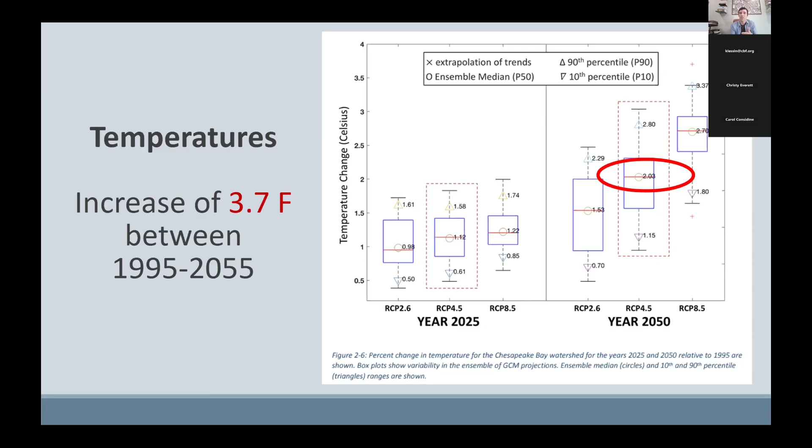For temperature, the median projection for 2055 is a 2.03 degree Celsius increase in temperature compared to 1995, which is the baseline that we use. In Fahrenheit, that's a 3.7 degree increase. Now that's Chesapeake Bay watershed-wide average. Obviously there's going to be some minor fluctuations depending on where you are.

Tying that into water, specifically precipitation first, you might have heard that warming climates are fueling larger storm events, like some of the major hurricanes that we've seen over the past couple of years, the large flooding events in Texas and Asheville, North Carolina, as well as locally.

Part of the reason for that is that warmer temperatures result in more cloud capacity for moisture. There's increased evaporation and humidity, and then those clouds can hold on to that moisture, and the rain falls in greater volumes over fewer rainfall events.

So while total average annual precipitation in the DC metro region from 2002 to 2021 is only about 5 to 15% higher relative to the beginning of the century, 1900 to 1960, there's been a 60% increase in the total precipitation falling in the heaviest 1% of days. So basically, these changing conditions are making 'when it rains, it pours' very literal, very tangible.

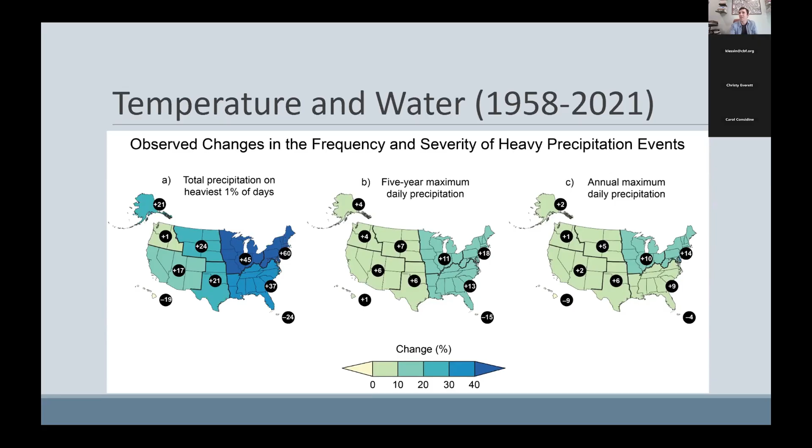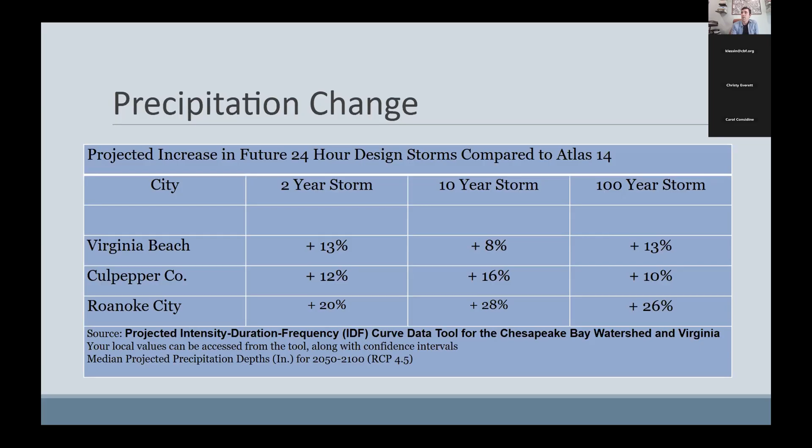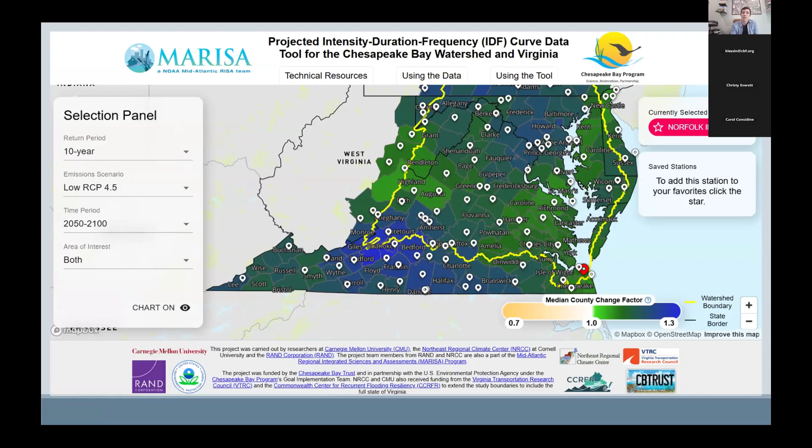This leads to obviously real world consequences in terms of flooding and water quality protection.

The other component, for our coastal folks, of the water projections and changing conditions is sea level rise. This is also from the Chesapeake Bay Program's climate assessment. By 2055, we're looking at a projected 1.7 feet, or 53 centimeters, of sea level rise for the Chesapeake Bay watershed. There are a lot of implications of that, obviously, from human health and safety perspectives.

But also, I think it's worth noting, as part of this assessment, the Bay Program looked at projected tidal wetland acreages in the Bay under these changing conditions using a model called SLAM, the Sea Level Affecting Marsh Model. Using 1995 again as a baseline scenario, they modeled losses of as much as 34% by 2055 with that amount of sea level rise—so significant marsh loss. That's a decrease of 110,000 acres across the Bay watershed by 2055.

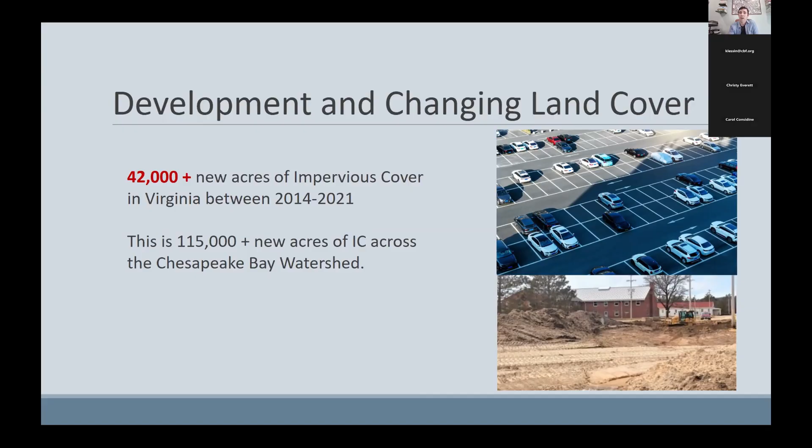And then finally, I don't think a lot of us think of time passing as a changing landscape, but Father Time does come for us all, as anyone who's been following Bill Belichick's path over the last few years can attest. Sometimes just sticking around longer than you should can have some really negative consequences for the operation of our systems. The aging of our infrastructure is in many ways its own changing condition that we have to be prepared to grapple with.

As our stormwater infrastructure continues to age, we experience myriad new problems, from pipes that corrode or break or clog, to infrastructure that just hasn't kept up with these changing climate conditions. Much of our infrastructure was designed using precipitation data from the 1940s, and it's struggling to effectively convey the modern 10-year storm event. So definitely something we have to think about in terms of our changing conditions landscape.

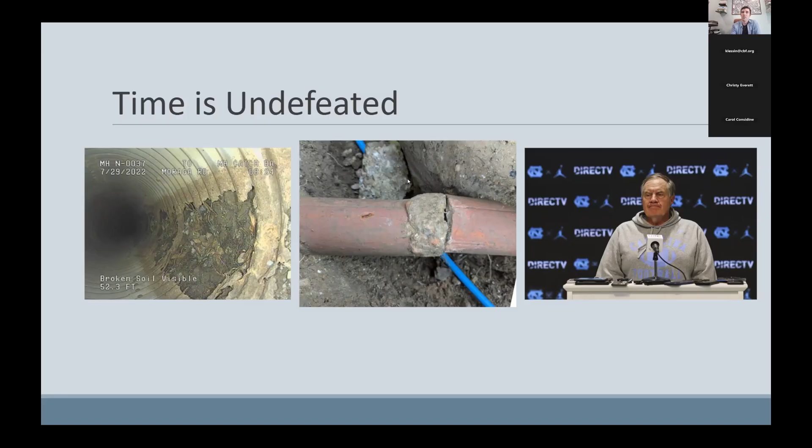So let's tie that in to the implications for stormwater managers. The subheader here for stormwater management: our runoff is going to be hotter, wetter, dirtier, and stronger. If you choose, you can sing that to the tune of the Daft Punk song for those who know it. But we'll stick to the basics here.

So we're going to start, again, going back to temperature with thermal impacts. When the air temperature warms, it heats the impervious surfaces in our communities, which radiates that heat back and transfers a lot of that thermal energy to any runoff that comes in contact with those surfaces.

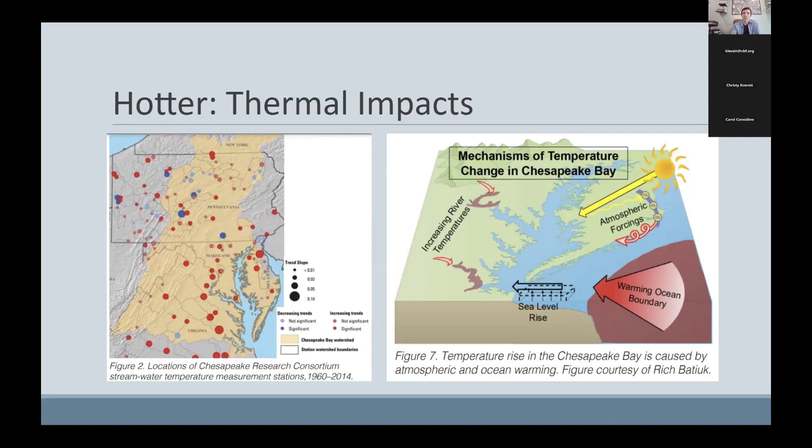So these directly influence our decisions that we make as watershed planners, as stormwater managers, about green space and green infrastructure investments, as we try to maximize our impact with the decisions that we're making.

Moving on to runoff impacts from these changes, we know that much of our existing infrastructure is undersized for future conditions. The pipes and detention basins were mostly designed using precipitation data from a resource called TP40 that came from NOAA, published back in 1961. Anything built between 1961 and 2006 used data that came from the first half of the 1900s.

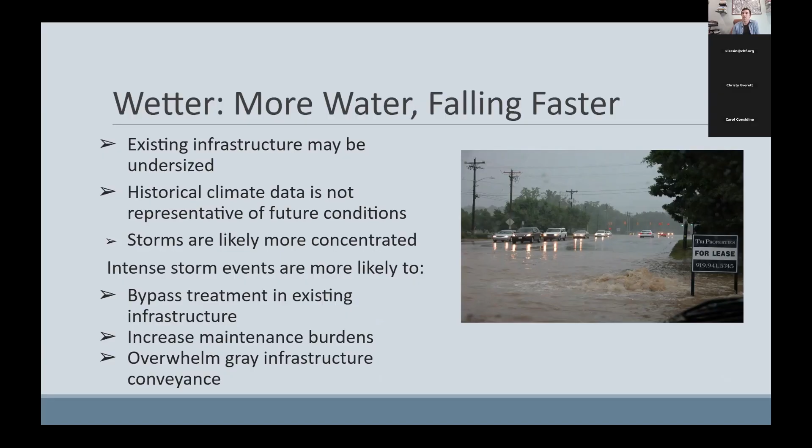As we talk about changing conditions too, the other way to look at this is with what we call our hydrograph, and a lot of you are probably familiar with this. More impervious surfaces in our watersheds and communities leads to more of the rain that falls being converted into runoff. So you have more runoff volume and more runoff velocity that you have to handle. And then you add in additional rainfall with these different climate conditions, and you amplify that effect.

In the pre-development case, when you have less impervious surface and less rainfall, you see the solid line on the graph where you get a relatively gradual peak as a storm event arrives, and it gradually recedes. Once we get more impervious cover and more intense rainfall, we get these more dramatic peaks - they are earlier, they rise quickly, and they recede quickly. Green infrastructure practices are designed to help us move closer back to the pre-development hydrologic conditions, that solid line condition that we're a little bit more comfortable with.

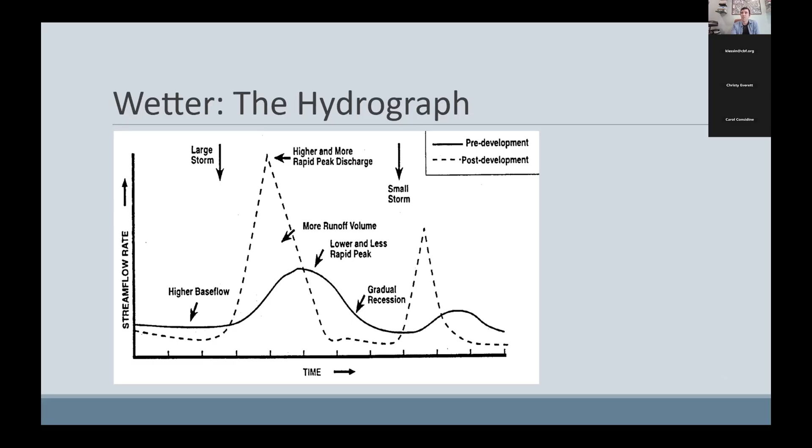Finally, just to touch on the dirtier water problem - more intense rainfall is more likely to dislodge and mobilize sediment and any contaminants that might be bound to it. We see lots of fine-grained sediments in particular being carried in suspension, and they get deposited in inconvenient places in our landscape. The top middle photo here is several inches of sediment accumulated in a detention basin. The photo on the bottom is several inches of sediment covering walkways in a park in DC.

Taken together, the impacts of changing conditions is likely to make water quality improvements more difficult. These graphs on the right come from the Chesapeake Bay Program's midpoint assessment, which was in 2017. They aren't the latest and greatest, but as they continue to run new models through their tools and refine their estimates, the general magnitude of these changes has held pretty steady.

The combination of increasing temperature, precipitation, and sea level rise has moved the goalposts of attainment of nutrient reduction goals. The change for 2025, when we were looking at it in 2017, was an additional 3 to 5% reduction required for nitrogen and phosphorus. Moving forward, we expect that level of effort to continue to increase as we go.

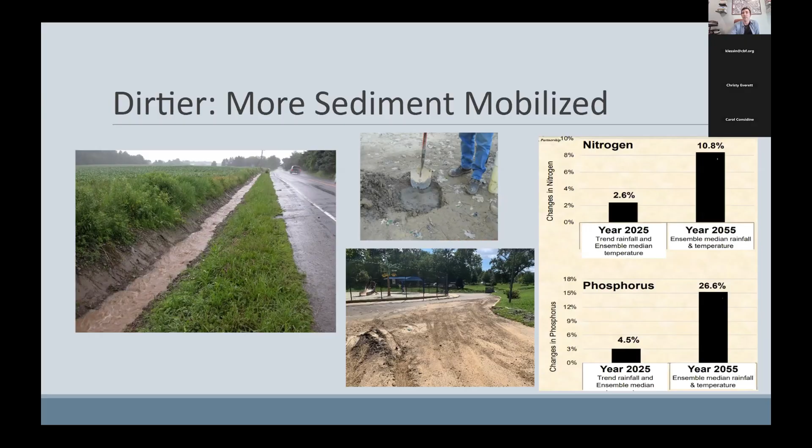So we're not only having to offset the growth of the urban sector, the developed sector with more impervious surfaces, but also the increased level of effort due to these changing conditions.

All right, so now let's make the case for green infrastructure in terms of the capacity it can provide, redundancies in our systems, and the multiple benefits that we can offer through these systems.

Starting with the most obvious or most direct, which is green infrastructure and flooding. Whether it's at the site, block, or sub-catchment level, targeted green infrastructure can help reduce localized flooding. This in turn reduces related impacts like basement backups and nuisance flooding, when stormwater inundates backyards, streets, and other public areas. When you distribute green infrastructure practices throughout a watershed or catchment, you can reduce total runoff and peak flows, which helps mitigate downstream riverine flooding and associated damages.

This is done by intercepting rainfall, creating opportunities to capture and infiltrate water. The figure here shows the decrease in peak flows, which was 5 to almost 30%, decrease in runoff depth of 20 to 50%, and decrease in total flow volumes of 25 to 45%, modeled across a range of different storm events for a watershed in New Hampshire where green infrastructure practices effectively reduced the impervious cover by about 20%.

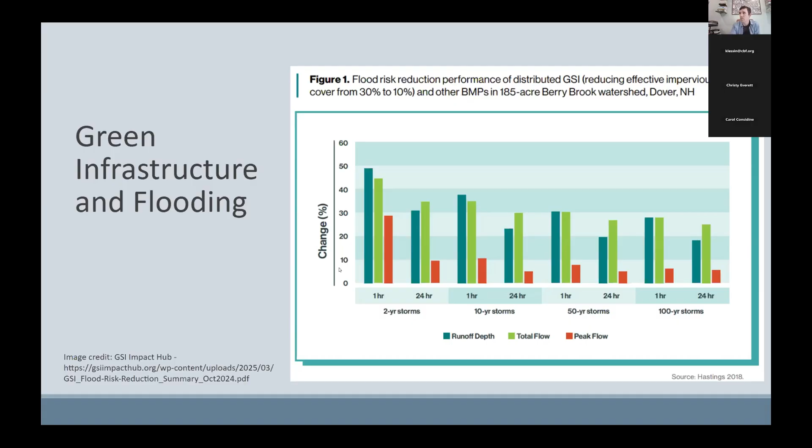Adding green infrastructure within that catchment or upstream can help reduce the flows heading to those flood-prone sections of your pipe network, and can provide some relief before you go in and dig up that whole system, which can be very costly, very expensive.

Green infrastructure strategies that include things like bioretention as well as tree-based practices also can reduce thermal impacts on stormwater by reducing heat island effects and cooling those impervious surfaces that are otherwise warming up.

A recent study modeled the impacts of green infrastructure on downstream heat loads affecting trout in Stroubles Creek watershed, near Blacksburg, Virginia. The authors found that combined practices reduced the total heat load by 62%, and the percentage of time the creek was heated above toxic levels decreased by 12% over the course of the summer. Further, heat loads from storm events were nearly eliminated altogether.

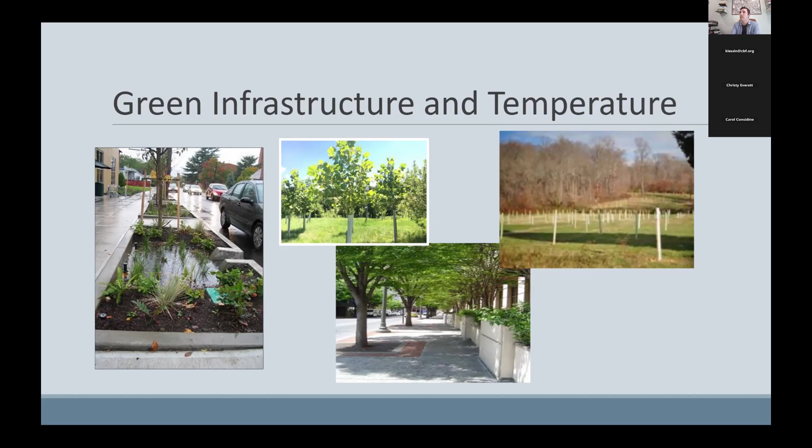It's also worth noting that, while not necessarily stormwater specific, implementing green infrastructure practices can also help mitigate heat-related maintenance and life cycle costs for critical infrastructure. For example, tree shade on asphalt reduces the impacts of heat and thus the need to repave as frequently. A study in California of shaded and unshaded streets, where large trees provided at least 20% shade, found savings of $1 per square foot in reduced repaving costs, by 58% over a 30-year life cycle. So there are some financial benefits to those impacts as well.

Then I think water quality benefits of green infrastructure are the ones we're probably most familiar with, but in the context of changing conditions, it's worth noting that because these changing conditions move our goalposts, increased rates of implementation are almost certainly necessary, even just to hold the line on pollutant reduction.

Green infrastructure also creates redundancies in our systems. Large detention systems are effective for reducing peak flows, but combining them with green infrastructure helps prevent those systems from being overburdened, and provides opportunity for capture and treatment throughout the watershed.

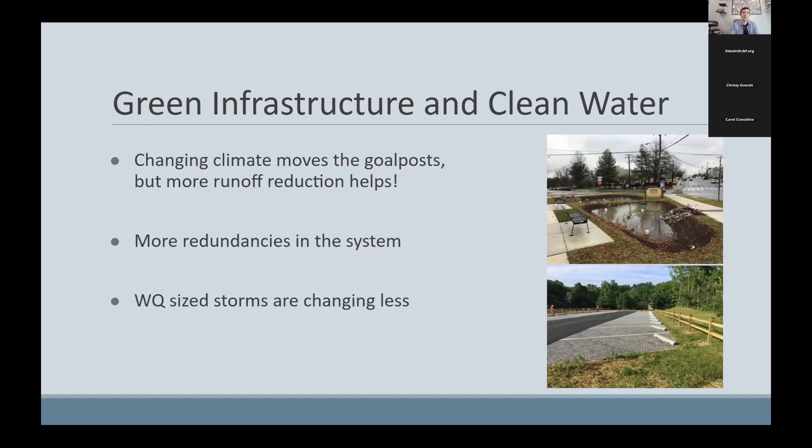Finally, while we're dealing with greater intensity storms, there's a fair amount of evidence that the 1-year storms, the 90th percentile storms, those more frequent events we're usually trying to use for water quality treatment, aren't being impacted as much. I mentioned how much of the burden of the additional rainfall volume is being added to those large infrequent events. So our water quality practices are still expected to be effective for those smaller events.

So I just want to close with three quick slides talking about some emerging challenges and upcoming resources to tie things together and lead us into Bill's talk as well. I'm just going to quickly mention maintenance, since Bill's going to talk about that much more.

While it shouldn't deter you from green infrastructure, it is important to consider maintenance at all stages of the project. These practices are designed for water quality, so we have to be aware of how large events might impact them—bypassing treatment, high velocities leading to erosion, clogged filter media, or distressed vegetation—things we need to keep in mind during the design phase.

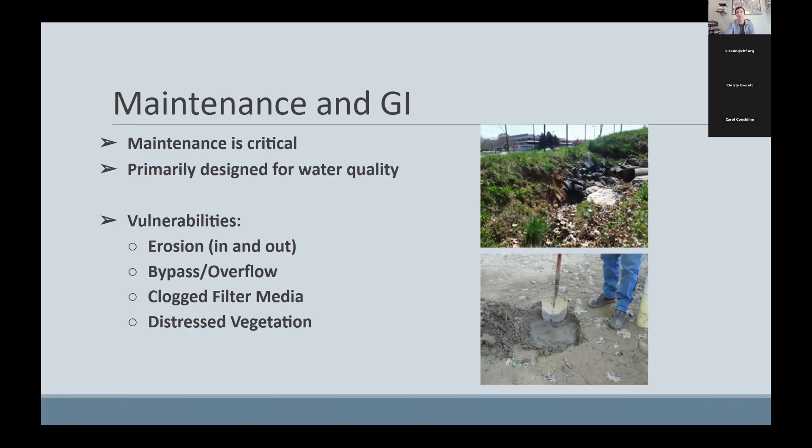Using rapid visual indicators—ways to quickly go out and check that your investments are okay without having to do a deep investigation—can help move things along and get you through your inspections more quickly.

When I talk about increased bypass of flow, what I mean is more flow being concentrated in fewer events. More of that flow is likely to move through our BMPs without having time to infiltrate, or in some cases, it might avoid entering the practice altogether. A study in New York in 2016 found 23 to 40% bypass for a lot of bioretentions during extreme events.

The non-extreme event bypass often happens because of maintenance conditions, like the one shown on the right. But a lot of times it's a poorly designed or undersized inlet—again, things we have to think about in our design.

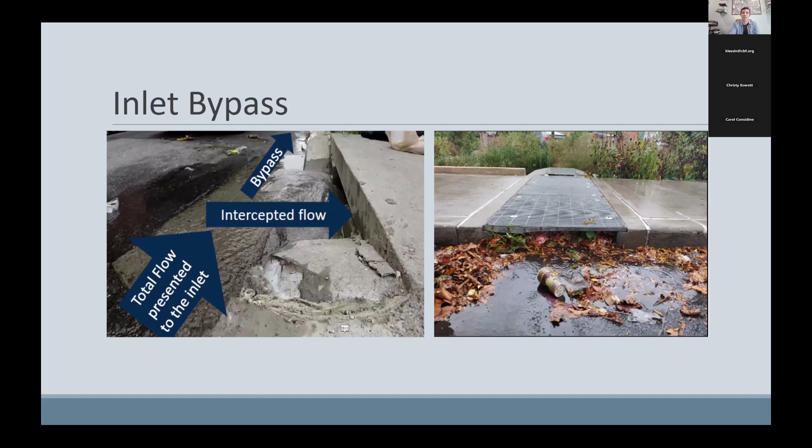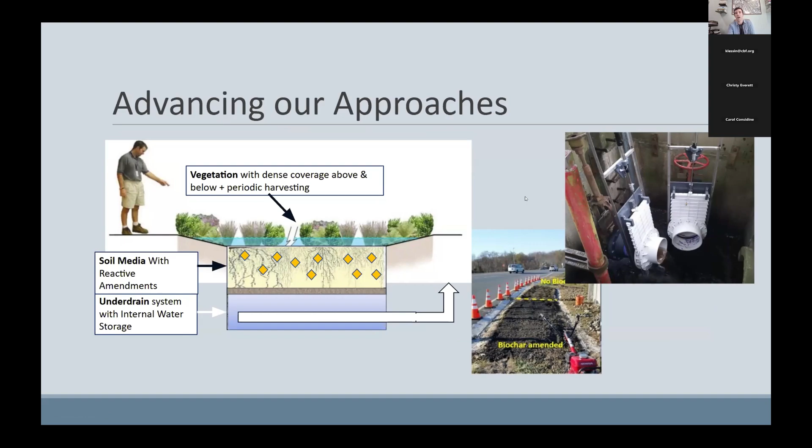Or we can squeeze more performance within the same footprint by doing things like adding soil media with reactive amendments or biochar, which can help increase storage volume. We can also modify our underdrains to create more internal water storage, or improve our vegetative practices as well.

This is the last slide—I just want to mention a couple of tools on the horizon as we continue to deal with these changing conditions. These are all coming from a project that the Chesapeake Stormwater Network is working on with a great team from RAND, Carnegie Mellon, Cornell, and the Watershed Institute.

The first is a practical guide to vulnerability assessments for stormwater agencies—different approaches to conducting vulnerability assessments, and determining what the right fit is for your resources and your needs.

The second tool is a way to basically interpret and use those climate projections more effectively for planning and design decisions—how do you decide which emission scenario or which time frame to use?

And then the last is a series of resilient stormwater design guidelines—essentially a menu of options we can take with our approach to designing green infrastructure practices that will make them more adaptable or more resilient to these changing conditions and changing landscapes.

Those are all coming out between this winter and the end of next year. So, a lot to run through—hopefully I didn't run too far over time. There's my email if anybody has questions, but I look forward to both Bill's conversation and the discussion.

Thank you, David. You provided a lot of information, but I think you did it in a way which hopefully won't be so overwhelming. Kudos to you for getting all those key topics in there, weaving in a very changing landscape, literally and figuratively.

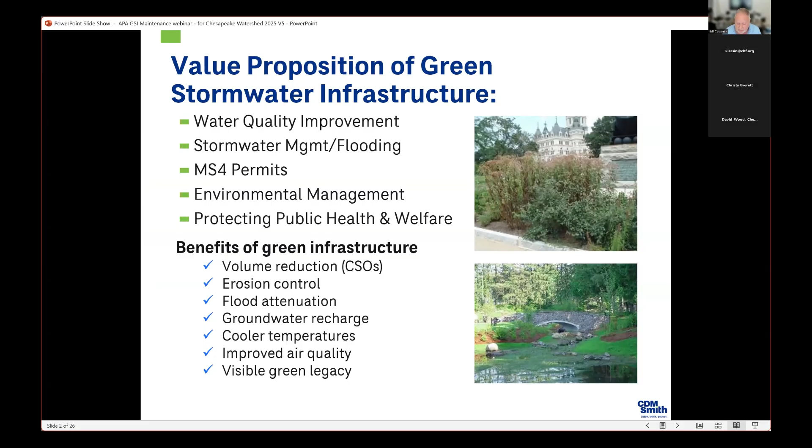David made the value proposition for green stormwater infrastructure. I don't need to go over that here, but it's important for water quality management, attenuation of flooding, environmental management, protecting public health and welfare, and there are many, many benefits.

GSI and GSI maintenance. We know green infrastructure is critically important in managing stormwater, increasingly so, given the four factors I cited before in the perfect storm. But we also know that assumptions about the difficulty and cost of GSI are often used to justify avoidance of green, and this is a little troublesome, but not surprising.

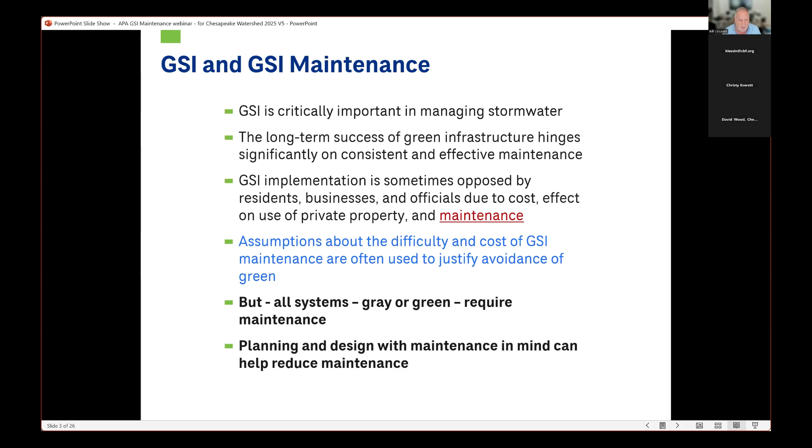All systems require maintenance, and by planning and designing with maintenance in mind, you can manage those costs. Two major concerns basically come up with respect to maintenance.

One is lack of expertise and experience in maintaining GSI. This is something we found to be especially true in public works situations or for private landowners - they really don't have a lot of familiarity in dealing with living systems.

The second is a misunderstanding of the methods and costs to maintain green stormwater infrastructure. So regarding item one, there's extensive information and guidance that has been published on GSI design, operation, and maintenance, and I'll run through a few examples of that in a few minutes.

There are studies conducted by EPA, University of New Hampshire, Cornell, and others that have concluded GSI and GSI maintenance is more often than not less expensive than gray. So it shouldn't be dismissed out of hand. But it is different, and that's what folks have often not recognized.

This quote from Sustainability Directory is great: the fundamental challenge of green infrastructure maintenance lies in understanding its ecological nature and adapting traditional infrastructure management approaches to suit living systems. That is really the change we're talking about.

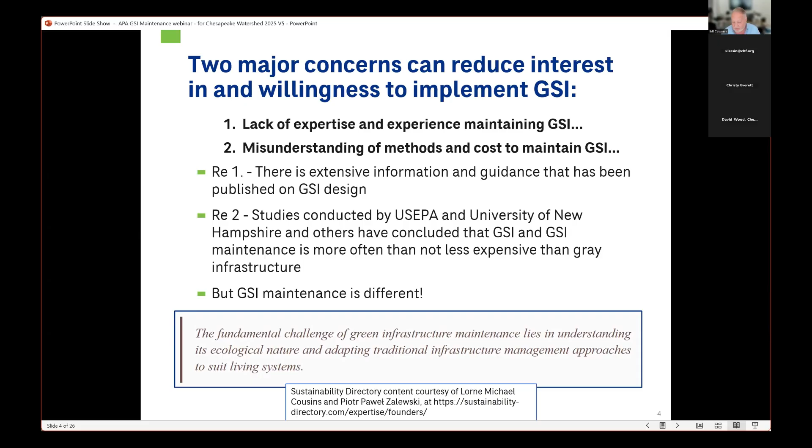Perceptions about GSI maintenance can impede broader GSI implementation. There are misconceptions about cost, and there's uncertainty about the long-term cost. We'll talk about that in a second.

GSI maintenance is more complicated and labor intensive than traditional gray. In green systems, we're talking about plants, soil, and living systems that need different kinds of maintenance, not necessarily more or less than gray infrastructure.

There has been unfamiliarity with specific maintenance requirements, and there's been a learning curve in the evolution of green infrastructure. In the beginning, when green infrastructure was being implemented, it was sort of a creative opportunity for landscape architects to put every kind of plant or flower they could think of, making these sites as attractive as possible. What we quickly learned was that would be a nightmare for maintenance later. Now the shift is to more monotypic grasses that have better performance.

In terms of data for maintenance requirements and success, that is evolving. This is certainly a learning curve we're on with respect to green infrastructure, but we have enough under our belt to build, operate, and maintain these systems effectively.

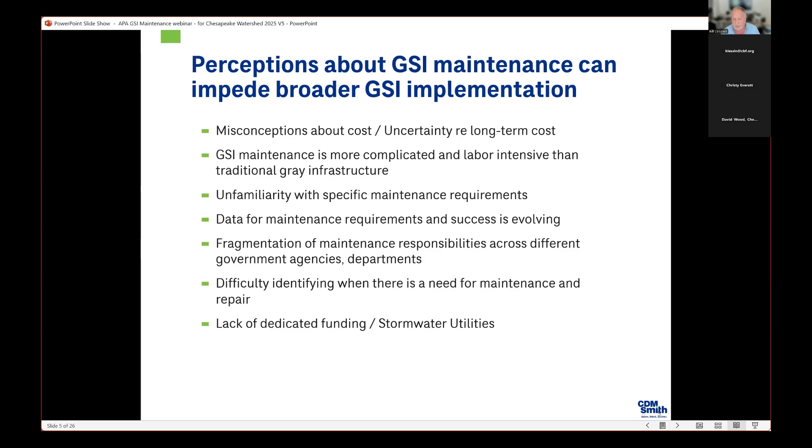And we found that stormwater utilities can be very effective in addressing that, but there are also other ways to work with the community to build coalitions for maintenance.

So planning with maintenance in mind is key. You want to assess your soils, conduct infiltration testing. You want to look at land uses, surrounding land uses, and prior land uses. In some cities, we found that green infrastructure was being recommended on top of old industrial sites where there was known pollution.

So those tend to be constraining activities. You want to be respectful of the drainage and the topography, and that's really a big change. In the past, we've piped stormwater from where we don't want it to where we do want it. Now we want to recognize the topography more and work with that.

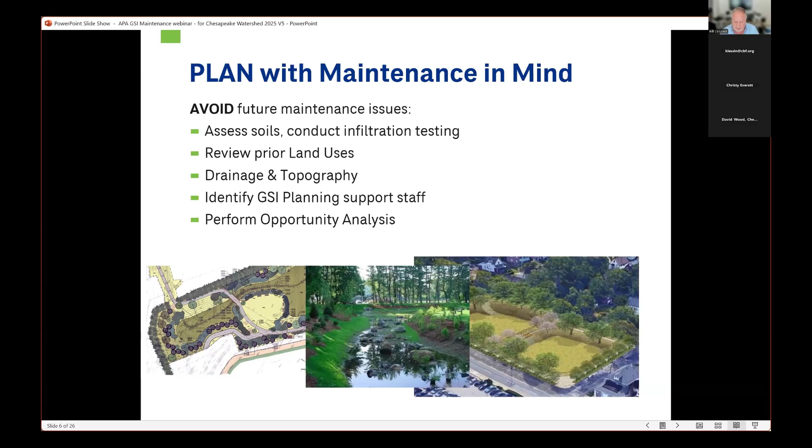We want to identify GSI planning support staff, and that's critical as well. Again, building that coalition among municipal departments or county departments or regional groups is critical. And performing opportunity analysis is really helpful. Sometimes you can have the planning department work with the engineering group and look at areas that might be suitable for green infrastructure installation.

There's also design with maintenance in mind. Avoid future maintenance issues by smart design. Install hardscapes instead of planted areas if trash is an issue. There are many good examples of hardscapes, of pervious pavement, of pavers that are highly pervious and are very effective.

But we also want to take advantage of the natural environment, trees and grasses. Install grasses instead of planting, and we find that the landscape architecture design palette has really been a little too creative in the past, and we're trying to, and being successful in, bringing that back to more effective plantings.

Provide ready access. This is often not thought of, but we need manholes, we need bobcat mower access, we need access to forebays that are trapping sediment, and be thoughtful about overflow bypass.

This is critical. What we've seen is that some cities want to design overflow valves into every single green infrastructure instance, and that's very costly. And often it's turned off and only used in case of local flooding.

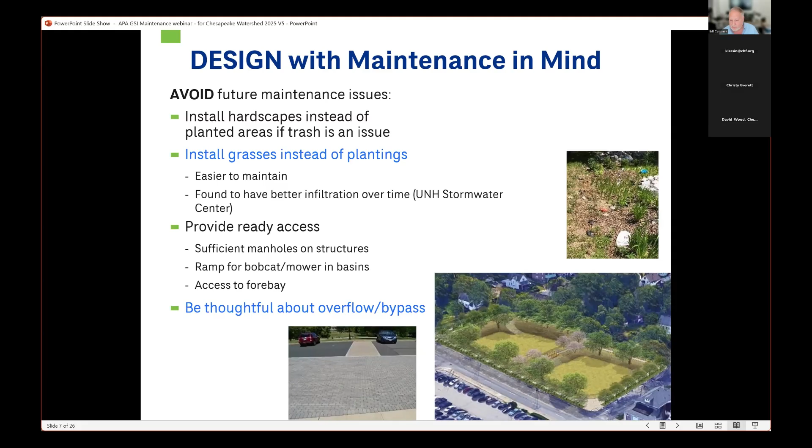New York City, for example, said, that's fine, let it overflow. It'll run down to the next catchment and be trapped there and be drained there. We don't need to add to the cost of each individual stormwater installation.

So, some considerations for maintenance. Most of the utilities that I've worked with, public works departments, are highly reactive. There's not a budget for green infrastructure or green infrastructure maintenance. And there's a need to shift to more proactive approaches. It lets you manage your costs better, and it also increases the reliability of your stormwater systems.

And how do we do that? We do that now increasingly through asset management software, where we can record our physical infrastructure digitally, we can come up with work schedules, and we can identify tools and crew assignments for managing green infrastructure the same way we manage water and sewer pipe and systems.

Construction inspection. This is critical. We've seen in many cities that poor precision on installation of green infrastructure facilities, such as street inlets, has led to need for repair down the line. And what we see is that when we're trying to capture an inch or an inch and a half of rainfall, if the inlet is a half an inch too high, we've cut out 50% or more of the effectiveness of that inlet to the green infrastructure facility just by poor installation. So tighter precision on construction inspection is really important.

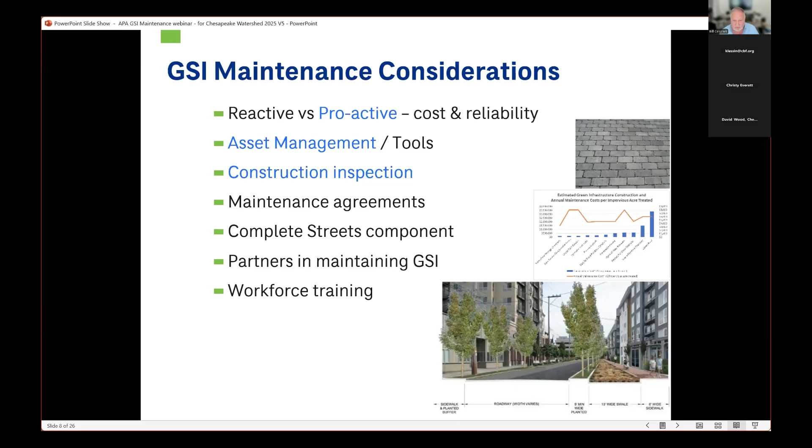So, are we lacking reliable and effective information about GSI maintenance? The answer is a resounding no. I'm going to run through a few examples of what's out there in terms of web availability, and this is just a small sampling.

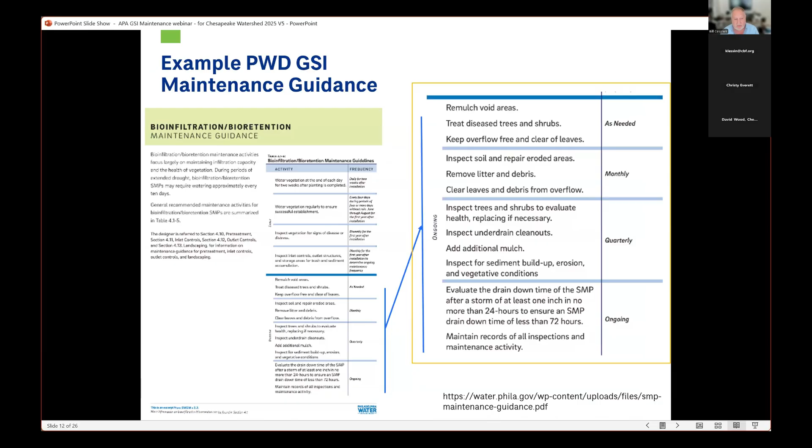Philadelphia has SMP maintenance guide documents, and chapter 6 is about post-construction operation and maintenance guidance. This is an example of that. They talk about remulching void areas, treating diseased trees and how to recognize those, and keeping overflows free and clear. So there is good information available.

In New Jersey, where I'm located, we have the Rebuild by Design projects, and we built a web page for the Department of Environmental Protection in New Jersey to help folks manage local stormwater infrastructure. We have the stormwater toolkit. A lot of folks said, well, we don't have any templates or guides, we don't have anything to give to our maintenance crews when they're going out in the field. So we developed some example maintenance cards that they could be given, showing what to look for at a particular installation.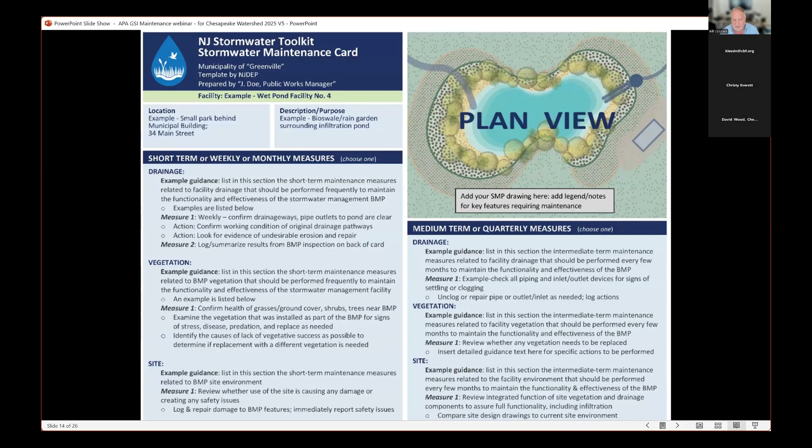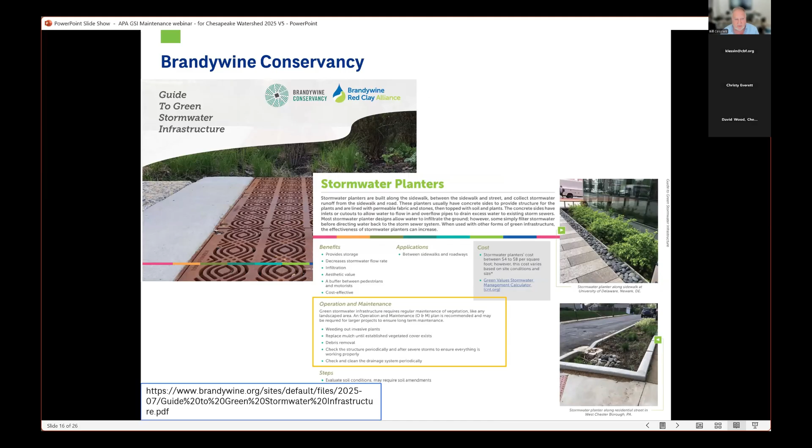Brandywine Conservancy has a guide to green stormwater infrastructure. They have a stormwater planter and operation and maintenance recommendations. We've also found that bioswales have become unpopular in some locations, since they need regular maintenance, and some locations are actually avoiding installation of bioswales.

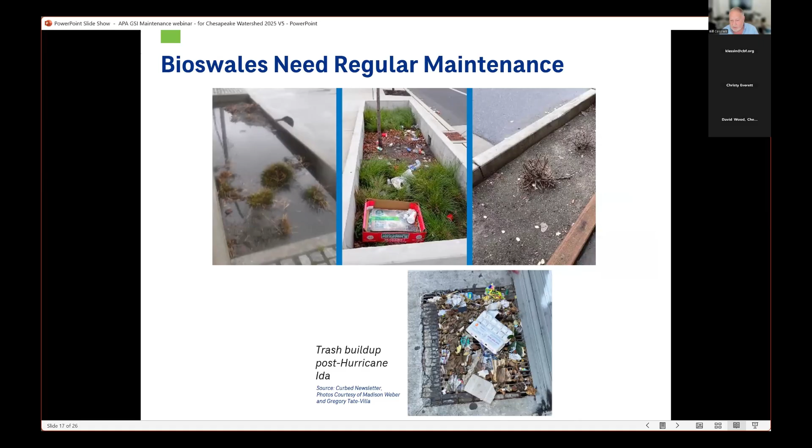This is what happens if you don't maintain your bioswales or street planters—they accumulate trash and debris. In some locations, you might not want to install them if trash is an issue or maintenance is a challenge; in other areas, you might want to increase maintenance of these facilities. Complete streets planning can include green stormwater infrastructure, and many guides, Denver as an example, have complete and green streets components.

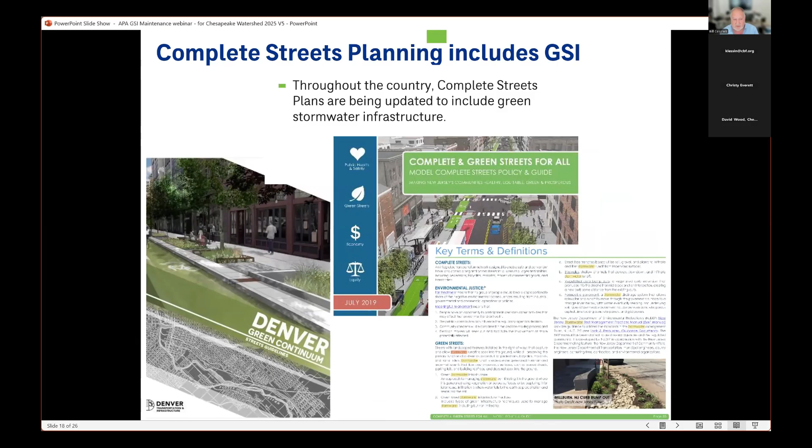So now let's talk about cost a little bit—this is always a challenge. ASCE has issued a report, a couple years old, that provides a wide range of maintenance costs. This is because utilities capture these costs in different ways and report them differently. As I indicated before, some utilities are lumping repair costs of poor installation into the maintenance budget. In other situations, poor installations have occurred, like pervious pavement that needs to be replaced—does that go under maintenance or not? That's a good question.

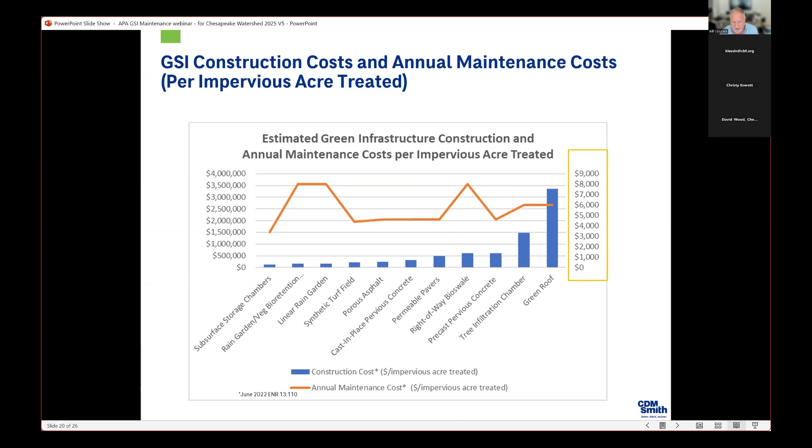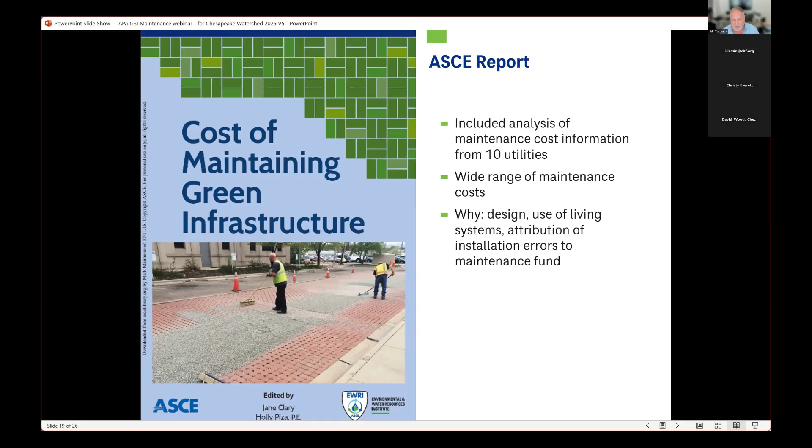We really need to be more careful about how we assign maintenance costs and tally them up. What we found is that if you're careful about tallying up those costs and assign them more properly, you fall into a certain range—you can see in this graph, 4,000 to 6,000 per impervious acre maintained. But if you design the facilities properly, use living systems, and account for attribution of installation errors, then we get a muddle of maintenance costs that aren't that reliable. So the jury's really still out, and a lot of systems are reluctant to report their maintenance costs because they're not sure they're accounting for them properly.

I just wanted to acknowledge all the many green infrastructure operations and websites out there that helped me put this together. And I'm happy to answer questions now. So thank you.